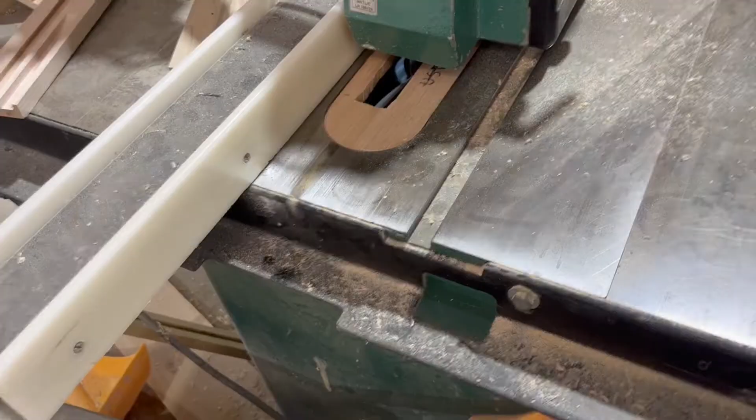So the interior, that's going to leave us with a 14-inch opening here and, let's see, 36, so a 33-inch opening from top to bottom, right? And I'm also not going to go over how to make a door for this because I want to focus more on the actual box construction for the corner cabinet.

I want to briefly go over some of the tooling that I'm going to be using. So this is going to be my 3/8 compression bit. You can kind of see that. This is going to be my bit that's going to do the full thickness of the cut, so it's going to actually cut out the pieces. We have a 1/2 end mill, and this is what we're going to do our dado lines with. So it's a 1/2 inch in diameter.

This is what we're going to be doing the shelf drill holes with. My machine actually has a drill bank, but VCarve can't control my drill bank on this machine. So what I had to do is I took one of those drill bits that would normally go up into the drill head, and I just put it inside its own tooling. And that's how we get around the inability to control the drill head on the bigger machines.

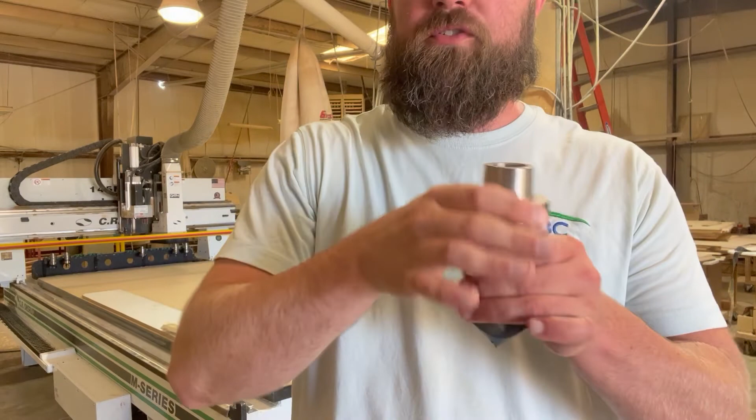And the last bit that we're going to be using, this is the V bit. All right, so this is 2.25 inch diameter. It's a single flute, and this bit has a maximum cut depth of 1 inch. So this is the tool that we're going to be using to cut out that clipped back support that's going to go behind the cabinet.

Now that we're loaded into VCarve, the first thing that I'm going to do is create a new file. Under job setup, single sided, 96 by 48, 1/2 inch on the material thickness. 0 is going to be the machine bed, and then bottom left for the XY datum. Hit OK. So the first thing I'm going to do before I get started is name all of my layers, and I'm going to name them based off of the tooling I'm going to be using. And this is something that I just do for every program that I use.

So our 3/8 compression, we'll color this orange. I'm going to add a new layer. This is going to be our 1/2 inch end mill. We'll color this one blue, and I'm going to add a new layer, and this will be our, we'll just say 5mm drill bit, and we'll give this one a green color. Alright.

So now that we've got our layers, I'm going to come over here to draw a rectangle. And I'm going to make sure my X and Y are at 0. In the X, I'm going to put 36 inches, and in the Y, I'm going to put 11.5. Alright. Now, let's make sure we have... I want to be in my 3/8 compression for this. So I'm going to right click.

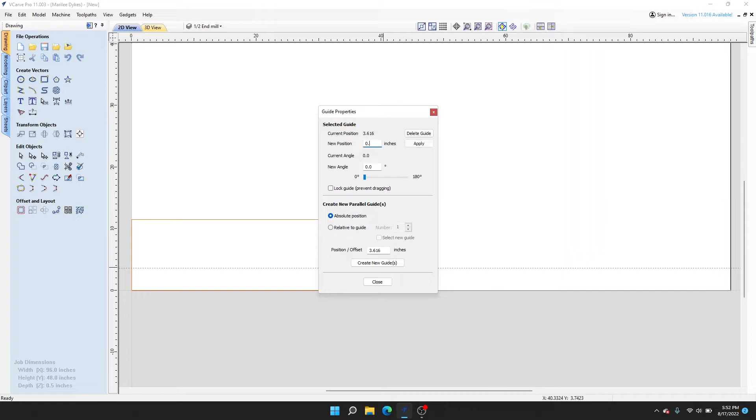Next thing I'm going to do is come up here and select my 1/2 inch end mill layer. So we've got that selected. I'm going to right click and throw in some guides. First we'll do a horizontal guide, and I'm going to put in my new position 0.5 inches. Hit apply. This is going to be my back rabbet line.

So we use 1/2 inch backs on most of our cabinets, so I'm going to be using that 1/2 inch end mill to run a 1/2 inch back rabbet down it. So we've got our 1/2 inch tooling selected. I'm going to turn on snapping, come over here to my line tool, and click on the left side and then on the right side.

I'm going to right click and just delete that guide for a second. So you can see it's blue because that was what I set for the layer color. Alright. Now that we've got our rabbet, I'm going to right click and insert a vertical guide. This one we're going to come over 3/4 of an inch. Typically on wall cabinets, you've got a 3/4 inch lip before your dados start on either side.

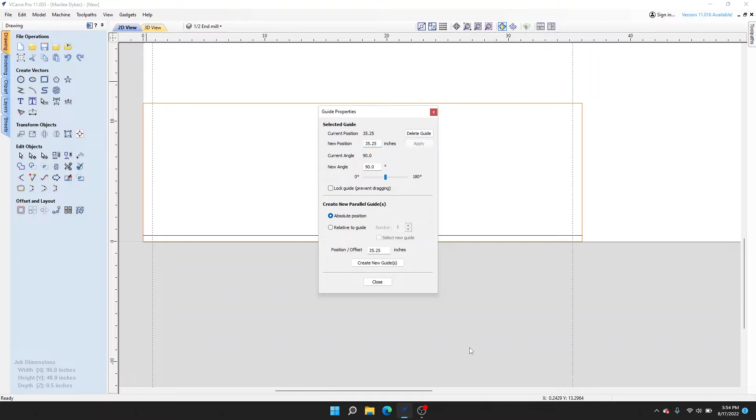So I'm going to right click, add another vertical guide, and in the new position I'm going to put 35 1/4, and that should give me my right side dado. That should be 3/4 inches spaced out. So we're going to do the same thing. I'm going to turn on snapping, come over here to the line tool, and I'm just going to create my dado lines.

Come up here to view, guidelines, and we're going to delete all guides so we can see. So it's looking like a wall end. We've got our dados and our back rabbets, so now all we need to do is add the drill holes. The way we're going to do that is I'm going to come up here and make sure I have my 5mm drill selected.

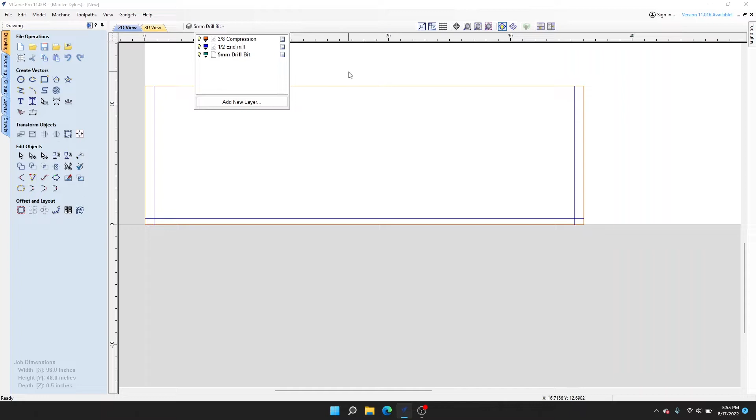I'm going to right click and create a horizontal guide first. For the first one, we're going to come in 2.5 inches from the top and from the bottom. So we'll do 2.5. That gives us our first guide. And we'll go another horizontal. This one, we're going to take 11.5 inches and subtract 2.5 inches from that. So that should give us 9 inches.

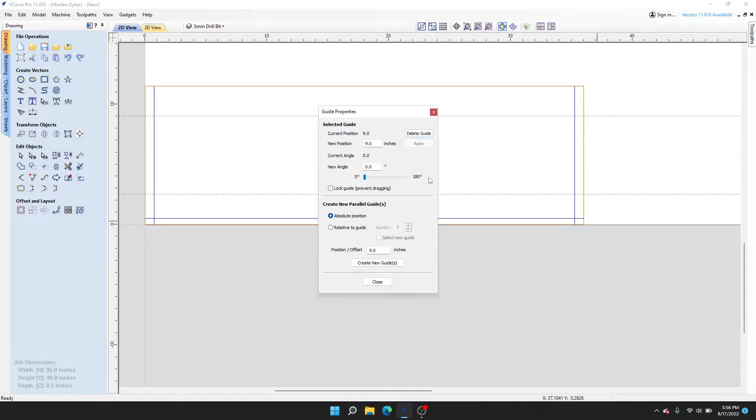Close that out. Now that we've got our two guides that represent where the center of our drill holes are going to be, we've got to figure out where the holes are going to start. I'm going to assume this is the bottom of my wall end. We typically start our drill holes 5.5 inches up from the bottom. So I'm going to create a vertical guide. These are 36 inch, so we're going to go 30.5, backwards 5.5 inches, and this is where our holes are going to start and where our centers are going to be.

So what we want to do now is come down here to create new parallel guides. We're going to turn on relative to guide. In the numbers, I'm just going to put 20. This is going to be the number of drill holes. So we'll just go 20 for now. Standard spacing is 1.25 inches between holes, so from center to center it's 1.25 inches.

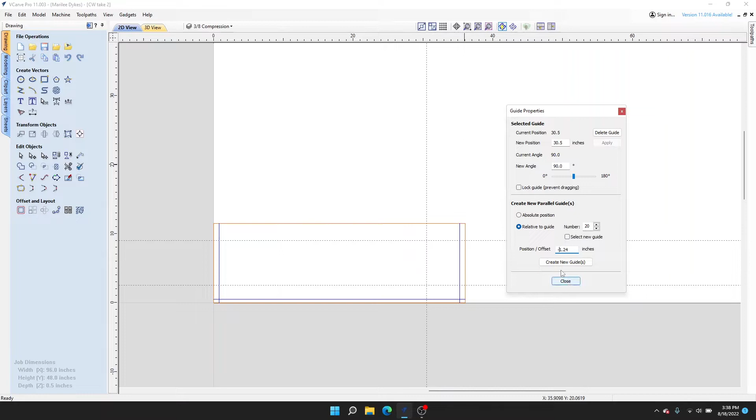What I'm going to actually do is put a negative sign. If I were to leave it positive, it's going to go that way. We want it to go this way 20 times. So I'm going to put that negative, and create new guides. Okay, there we have it.

So now that we have all our intersections, we're going to come over here to draw a circle. The radius really does not matter. I'm going to leave it at 0.15. I'm going to zoom in, turn on snapping, and just start clicking right here on the center of each line. The reason this doesn't matter is because I just need the center point. We're going to let the physical diameter of the drill bit drill out the hole.

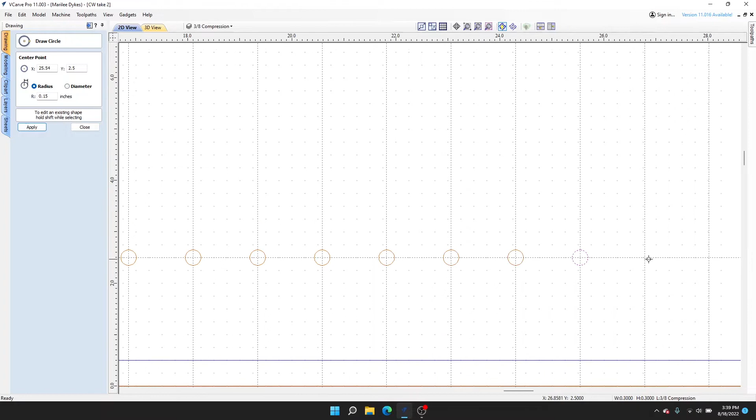Now that we've got all our drill holes put into place, we're going to close out of this. Let's turn off snapping, come out to view, and we're going to delete all guides. One thing I forgot to do is select my drill layer, so let's just select all these drill holes. We're going to right click, move to layer, so we'll move to the 5mm drill bit layer. So now they're green.

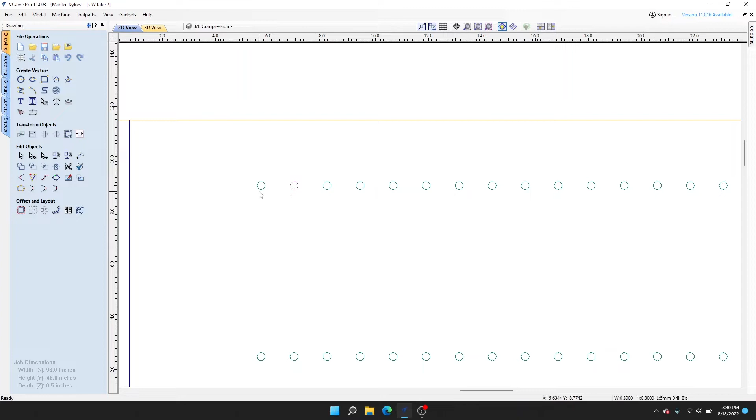So if I were to select each hole, they select independently of each other. When I go to assign the toolpaths, if I leave it like this, then I have to assign the path for each one, and that will take too much time. So what we're going to do is select everything. We're going to come up over here to group selected. And what that's going to allow me to do is if I click one, I click them all, and that's going to make it easier for me in the tool assignment phase.

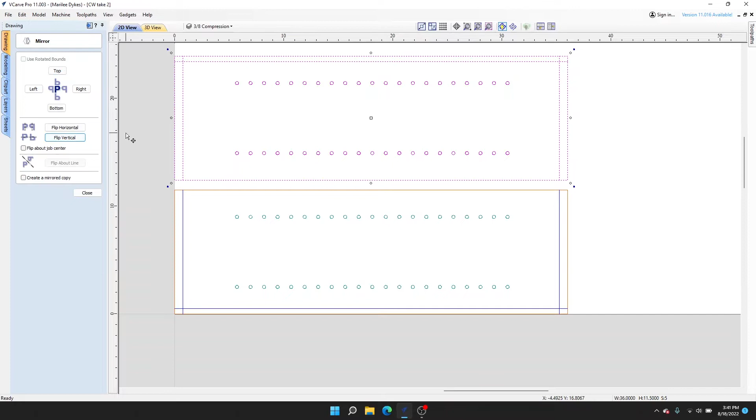So what we want to do now is right click. We're going to copy. We're going to paste it on itself. I'm going to use the arrow keys and we're going to go up just like that. And the very last step, I want to come over here to mirror selected and flip over the vertical, and all that is doing is flipping that back rabbet so that way we can make a left and a right. So that's it for the wall ends.

So moving on to the back, we're going to select our 3/8 compression layer. We're going to draw a rectangle. It's going to be 36 inches by 21.5, so that looks good. We're going to hit create. Alright, so now we are going to go into our half-inch end mill layer, and we're going to put in some dados. First one, I'm going to insert a vertical guide at position 35.25. Hit apply. We're going to add another vertical guide, and I'm going to put this one at 0.75 inches.

And this is where we want our two dados to be. So I'm going to click my line draw tool, snapping on. We're going to connect these two, right click. We're going to do the same here. Just like that. Turn snapping off. Alright, so what I need to do now is delete this guide, but I'm going to keep this one. And we're going to come up 5.5 inches just like we did, so that way our holes line up. So I'm going to put 30.5 here, and we're going to hit apply.

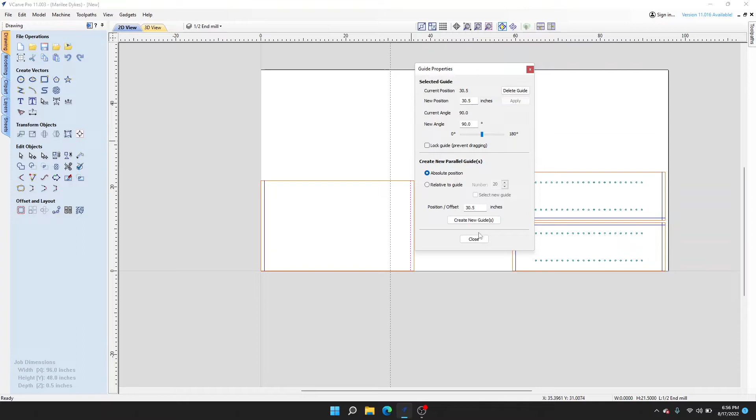Alright, so now I need to know where we're going to center these on, and to do that I'm going to close this out. We're actually going to put a horizontal guide in. I'm going to right click, and we're going to come up 16. There are wall cabinets where the back drill holes go in the back, but I'm going to put mine in the side, oriented more towards the back. So if you can imagine, this is towards the back side of the cabinet. This will be where the door is, the front.

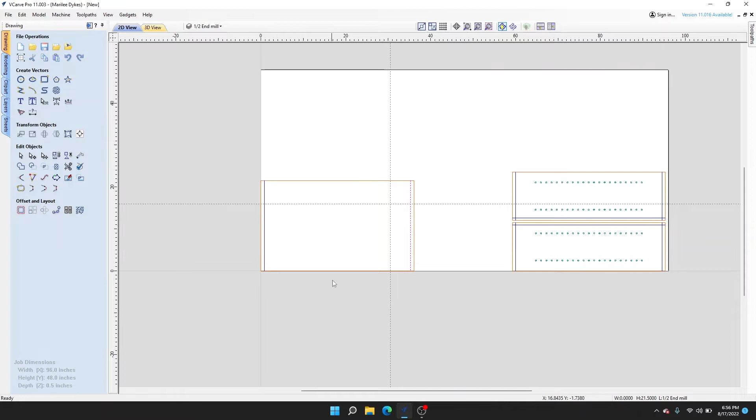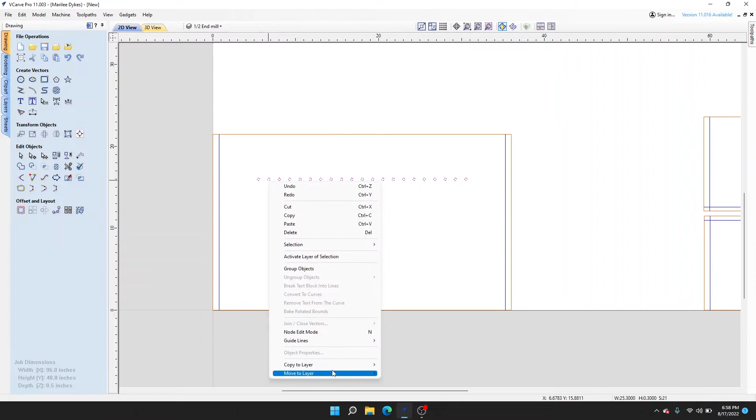So I'm going to right click this guide. We're going to come to relative to guide, just like we did for the wall ends. 20 times, we're going to do a -1.2 offset, and we're going to hit create. And that is going to give us, just like before, all the intersections where we're going to put our circle. Alright, so we've got our drill holes added, so we're going to come up to view, delete all guides. We're going to right click all these because we forgot to put them in the drill layer, but that's okay. Move to layer, 5mm drill. They should all be green, so we're going to select them all, group them, and now they are grouped.

So the last thing to do here is we're going to select everything, copy, paste. I'm going to use my arrow keys, so we're going to move everything up, and then I am going to come over to the mirror, and we're just going to mirror that. And that is the backs.

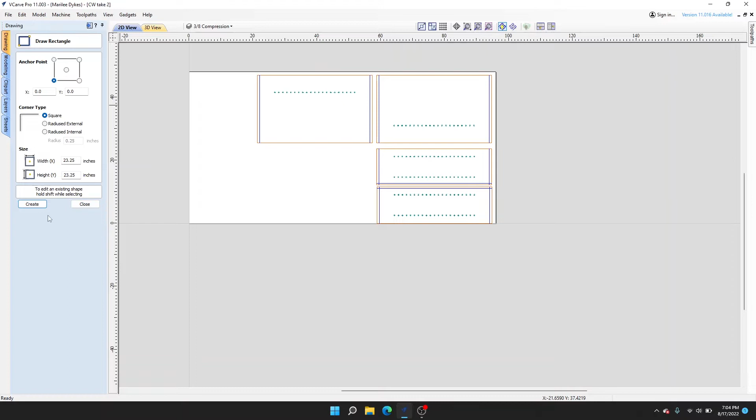We will now create our tops and bottoms. So we're going to come up, make sure the 3/8 compression layer is selected. We are going to go back to the rectangle, and for our width and our height, we are going to go 23 1/4. We're going to hit create. We're going to close out of here. So first thing we're going to do is create a horizontal guide. We're going to come up 2.5 inches.

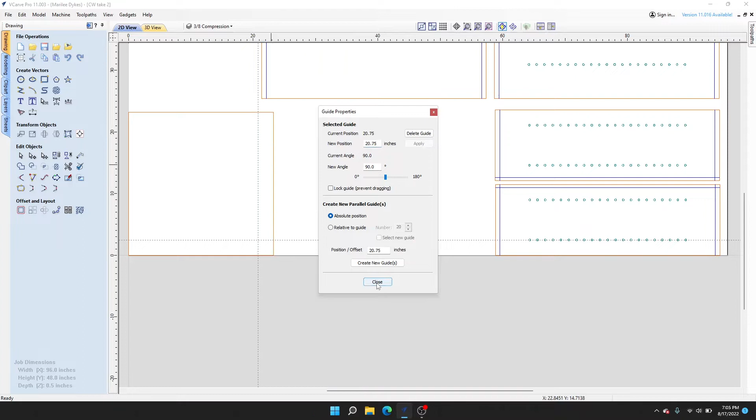We are going to create a vertical guide. We're going to right click that, and we're going to come 20 3/4 and hit apply. So now what we're going to do here is we're going to go turn on snapping. We're going to come to our line tool, and we're going to connect these two intersections.

Alright, once I've got that connected, I can come over here to my interactive trim, and I can get rid of that. We'll delete these out so we can see what we got. And that's going to be my clip. That's my clip for the back of the tops and bottoms.

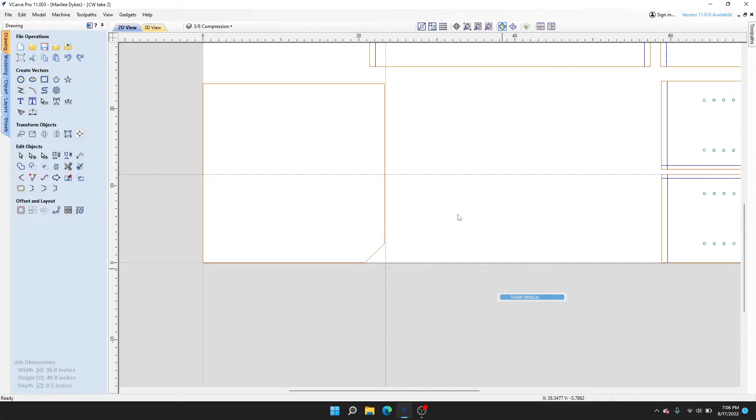So now what we want to do is we're going to come back and we're going to create another guide. Horizontal guide, and we're going to come up 11 1/2 inches up, and then we're going to create a vertical guide, and we are going to put in 11 3/4.

And what that should say, I need 11 1/2 from here, and I need 11 1/2 from here. So that 11 3/4 gives me that 11 1/2 right here. So we're going to do the same thing as before. Turn snapping on. Draw our line, connecting the two intersections. Right click out of there. Let's grab our trim tool. Let's delete these out to see what we got.

And there we've got the basic shape of our tops and bottoms. The only thing we need to add is if it's going into a face frame, we need to add the notches right here and the notches right here. So to do that, we're going to right click. We're going to start on this side. So let's create a vertical guide, and we're going to come over 1.5 inches.

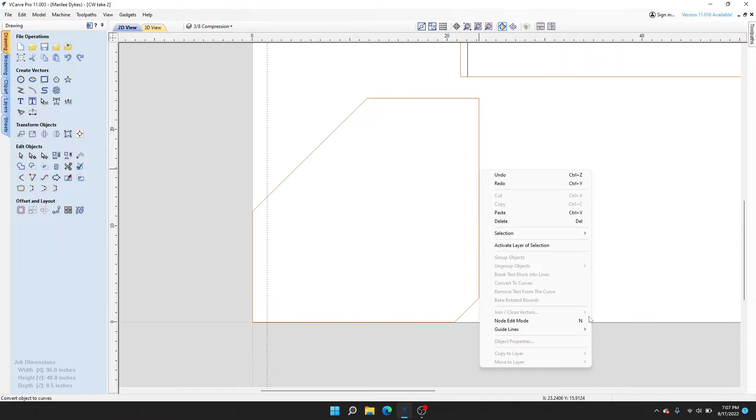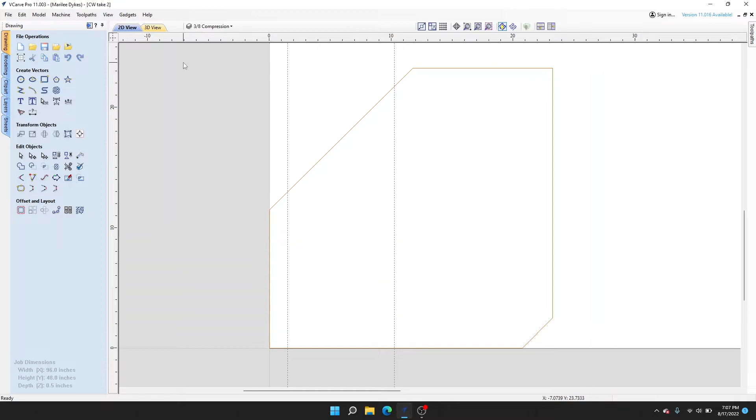Alright, and then we're going to create another vertical guide, and in this one we're going to put 10 1/4. Alright, so this is where we want the notches to start. So the next thing we want to do is to add the two notches. There's probably a couple ways to do it, but the way that I'm going to do it is I'm going to come down to offset and layout.

I'm going to select an inward offset, and I'm going to do it 0.25, so 1/4 inch, and I'm going to hit offset. Well, first I need to select the outline and then hit offset. So what that did is it basically brought everything in a 1/4 inch. So what I'm going to do is I'm going to zoom in here. I'm going to turn on snapping. And I'm going to click right there, and I'm going to get it on this line.

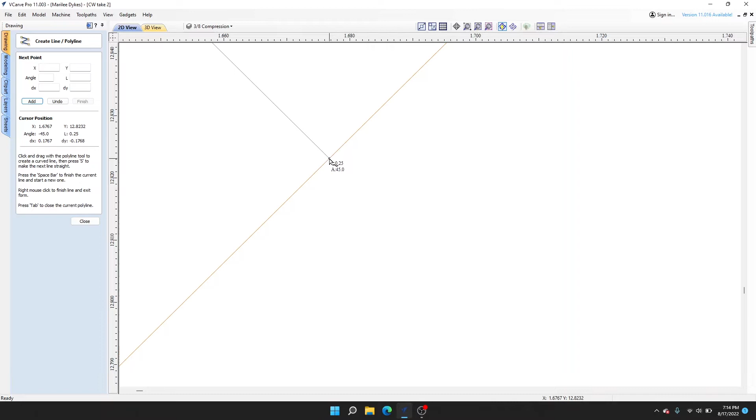I want to make sure that we're at a 45-degree angle. Come on. There we go, 45-degree angle. And then I'm going to come down here. I'm going to click on that point, and it doesn't really matter where, as long as you make sure the angle's 45. That's all we want to do there.

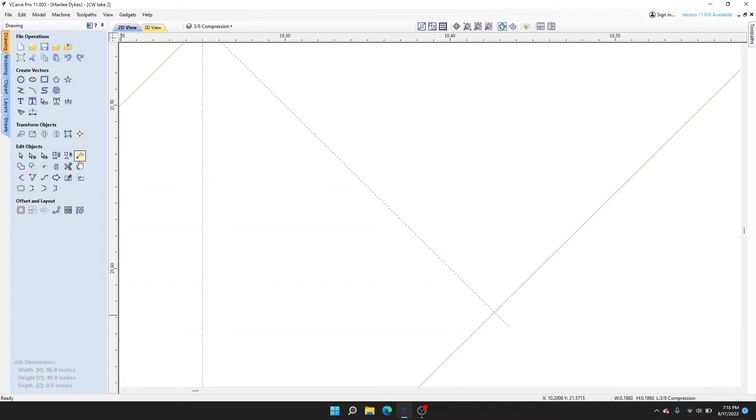So then we're going to do the same thing right here. Hopefully this one doesn't give us as much trouble. So I'm going to select my line tool. We're going to come over here and we're going to do the same thing. So we're going to get it down here. And there's my 45. I'm just going to go ahead and kind of clip that off. Alright.

So now we're going to grab our line tool. We're going to do the same. So I want to select that corner. I got a 45. It's okay if it hangs over a little. We're just going to get our trim out. And so now what we want to do is we just want to trim out this area. And I'm also going to trim out this little tail.

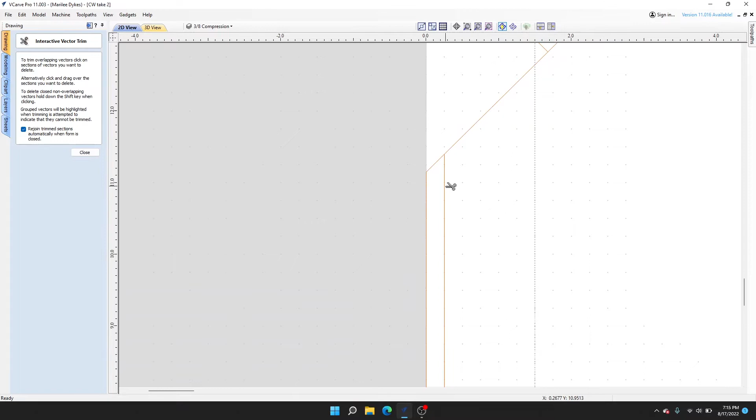But then I also want to trim out this whole inner line because we don't need that anymore. So we're going to get rid of that. Let's also get rid of that. There we go. All right, so I turn off snapping, let me delete all the guides out here. So there we got our top, and these are going to be the notches, and it does not matter that this is not rounded. The physical bit is round, and so that will give us that rounded. So you don't have to worry about putting a chamfer there.

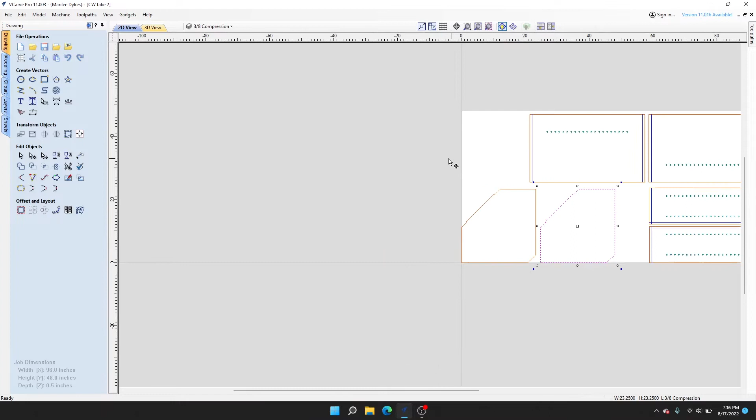So this is done. So we're going to grab everything, right click, we're going to get copy, paste, and we're going to use the arrow keys and we're going to move this over. And for the 1/2 inch material, that is it. Hopefully that wasn't too painful to watch.

Alright, so we're back at the main screen for VCarve. We're going to create a new file. Single-sided operation, that's all going to stay the same. The material thickness, we're now going to plug in 3/4 material. Machine bed is fine, everything's fine, so we're going to hit OK. Alright, so here is our 3/4 sheet of plywood.

Alright, so on this one, we're going to just do 2 layers. We'll do our 3/8 compression. I'm going to color that orange because that's what I always do. And then we're going to add a new layer, and this is going to be our V bit. We'll just put V bit. If you got different angles, you can put the angle it is.

Yeah, let's make this one pink. Why not? No, that's orange and pink is too close. Let's do like a dark blue. All right. So we're gonna go back to our 3/8 compression layer. So we're gonna make another rectangle. This is going to be a square.

And to fit this cabinet, it is going to be 22 and 11/16. So that is going to be 22.6875. And we're also going to put that in the Y, 22.6875. Alright, that all looks good. There we go. We got our first shelf. So from here, similar processes, it's all pretty close to the same.

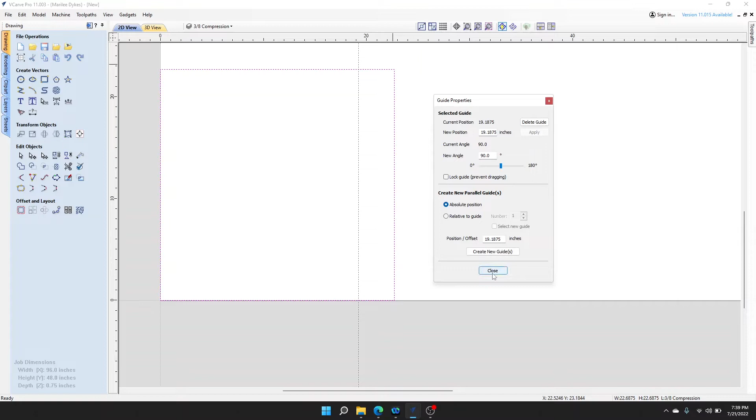And then if we close that out from the bottom, we're going to create a horizontal line. And we're going to clear out everything here, and we're going to go 3.5. We're going to hit enter, apply. Alright, so let's measure this thing. Man, that sounds like some funky numbers. So let's measure it, and we'll just see where we're at.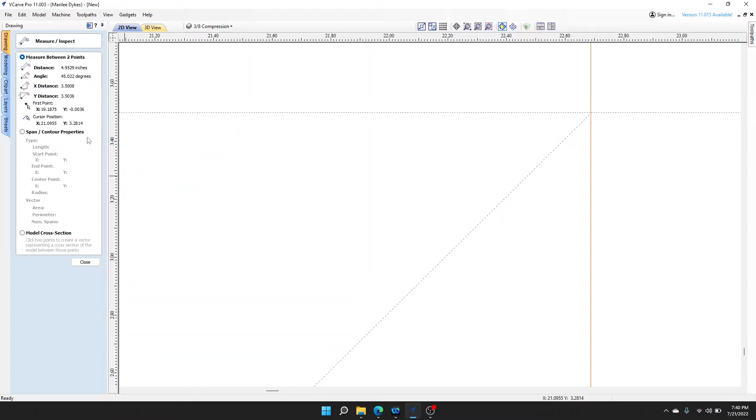So I'm gonna zoom in here, we're gonna click. And if you can see over here, I got it over just a little bit on the right, but we're 3.5036, so we're 3.5 inches. We're good there. All right, so let's turn snapping on. We'll go ahead and get our line tool. We're gonna connect the dots. I need to be a little bit more precise there.

All right, so let's travel up here, zoom in. That looks better. So there we go. So that's our clipped back for the shelf. So we're gonna come in with the trim tool, trim it out, hit escape, and there we go. All right, so for the top section, we're gonna come up 10.5 inches.

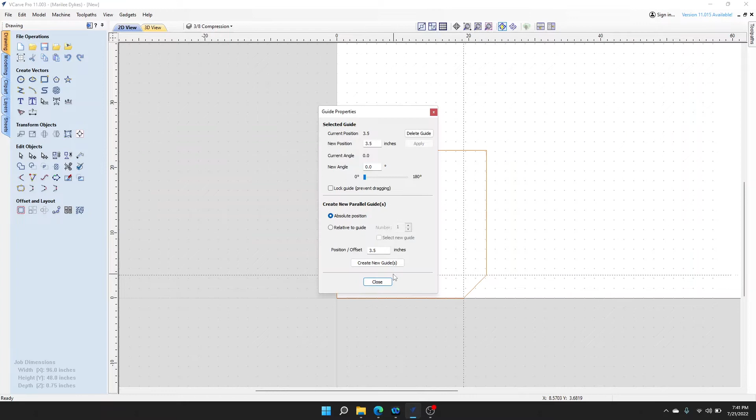So instead of 3.5 here, we're gonna go 10.5. That's going to get me there. And on this, we're going to say 22 and 11/16 minus 10.5. That's going to give us 12.1875. So we're going to put 12.1875. We're going to hit apply.

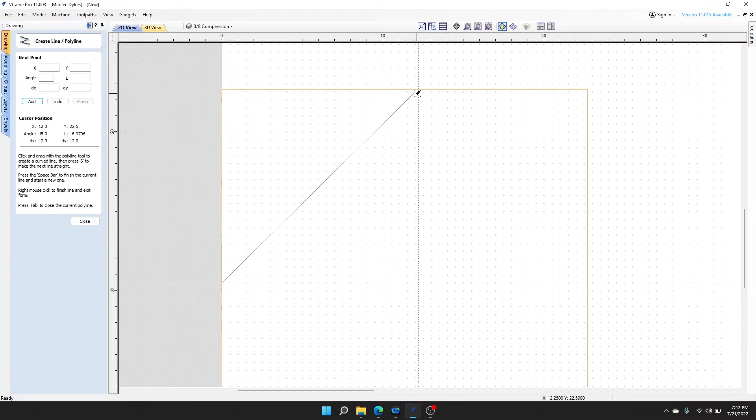And whenever you have numbers like that and you're not sure, just always get out the measuring tape, because we want 10.5, and when you're dealing with decimals, there we go, 10.5, perfect. So we know the math works out. All right, so now same thing as before. So we're going to come over to our line tool, zoom in, boom. There we go.

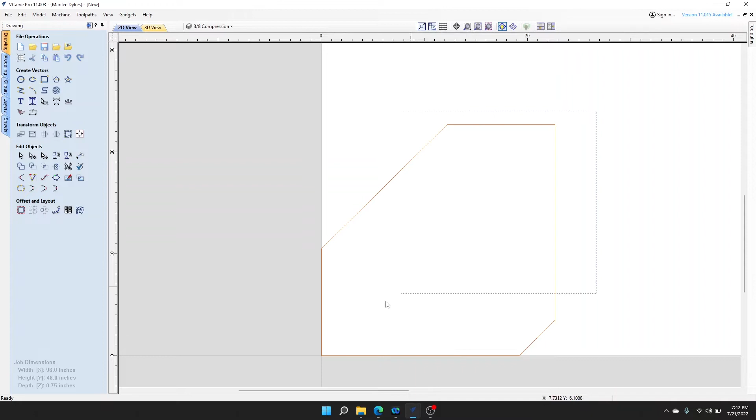Let's turn off snapping so we can see a little better. Hit escape. I'm going to delete this guy. I'm going to delete this guy. All right, there we go. So that's basically our shelf that's going to sit in there, and this one's pretty easy to visualize. Once it cuts out, it's going to be an angled shelf. So same as before, we're going to copy this. We're going to paste it on itself.

And you can use the mouse to move it up, or the keyboard. The mouse is faster, but the arrow keys are a little more precise. All right, so the very last thing we're going to do, I'm going to get both of these. We're just going to move these over out of the way. So we're going to make that

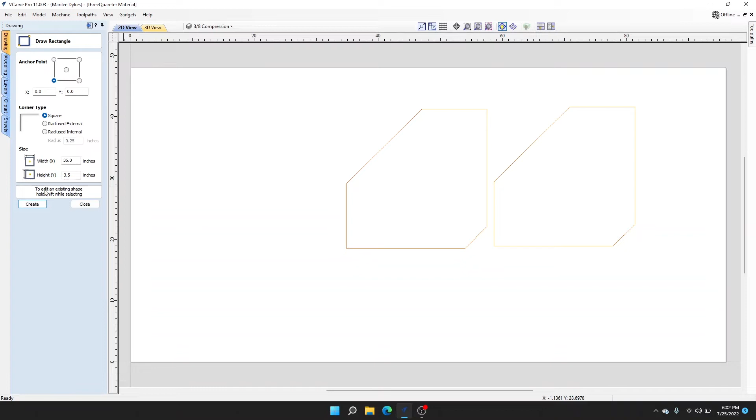angled clip support. So the last thing we're going to make is that clipped angled back support for the cabinet. It's going to go right across here. And so what we're going to do is we're going to make a rectangle. I'm going to go 36 in the X direction and 3.5 in the Y. We're going to hit create. Close this out. Let me just move this up and over a little so we can see what we're doing.

All right, so this is basically done, but there are a couple steps I need to do. If I select this all at once, see how it's all joined together, I need to break it up so I can assign my 3/8 compression on the ends to cut all the way through, but I want my V-bit to do the miters on the top and on the bottom. So I'm going to select it, hit N on the keyboard for node, and I'm going to start hovering over each corner and pressing the letter C.

And it does not look like anything's happening, but if I hit N again to exit node mode, now I can select each line individually, and that's going to be important for when we go to assign the tooling.

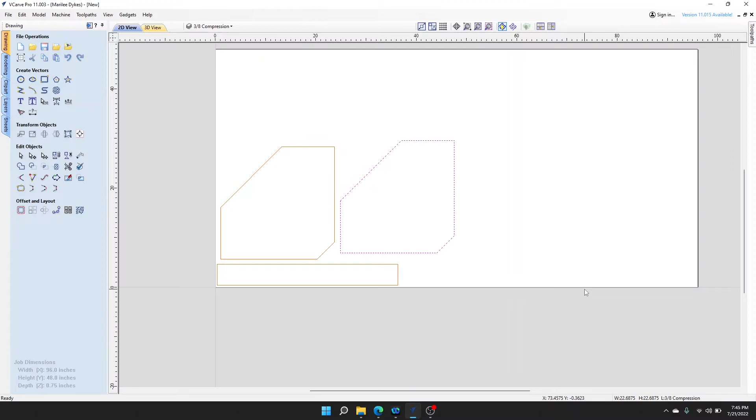That's basically it. The 3/4 material is not going to take up a full sheet. So we'll just rearrange this a little better, and for the body parts, it's kind of hard to get more than one cabinet on a full sheet, but for the shelving and stuff, if you're someone who's trying to be efficient, you can always fill this up with shelves and this piece, so you can at least optimize the full sheet.

And a trick, if you are using a CAD-based cabinet program. So I primarily use a CAD-based program to do all my designing, and my CAD will automatically cut straight lines out of the waste to make it more usable. This program won't do it, but an easy trick is if you're doing this on a full sheet of plywood, it'll just punch these right out of there, and you're going to have some funny shapes

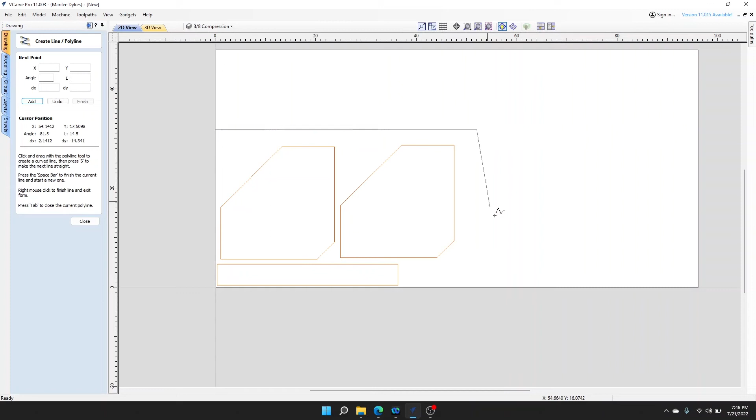in your plywood. So one thing you can do is just draw a simple box around whatever it is you're doing, and you will use your final cut-through bit to cut that out. And you could even keep this line going here, so that way you have a usable square here and a usable square here. So your only funny shaped scraps are going to be just this section here.

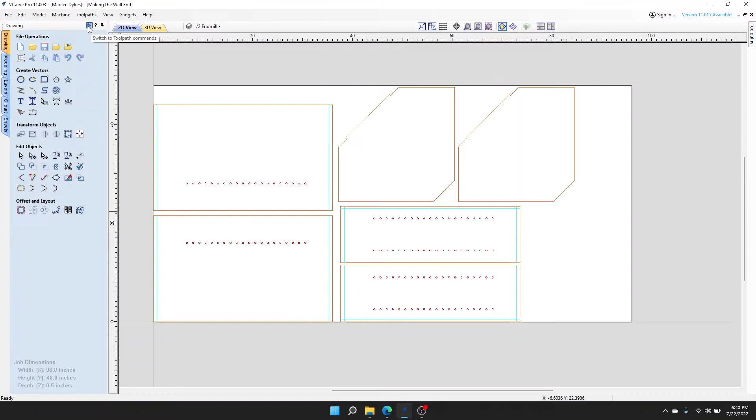So, all right, it looks like the only thing we have left to do is assign all the toolpaths to everything we've drawn up. So we've been in the drawing side of the program mostly. Now we're going to come up here to this little blue arrow that says switch to toolpath commands, and it's going to bring you over to this side, and this is where we're going to assign all of our operations. Here you can adjust the material if you need to.

We're going to start out with our 1/2-inch sheet of plywood, and basically I'm going to assign the drill holes first, then the dados, then the final cutouts. The reasoning is because that's how I want the real world operation to be. I want to do the drill holes first. All right, so we'll just start left to right, and remember how we grouped these. So now, one click, I select them all.

We're going to come over here to toolpath operations, and I just want to make a quick note that whenever I go into any of these commands, they're pulling the information off this tool database that contains all the information on the tooling. And if you're new to VCarve, you have to have your tooling information put in here before you can select it.

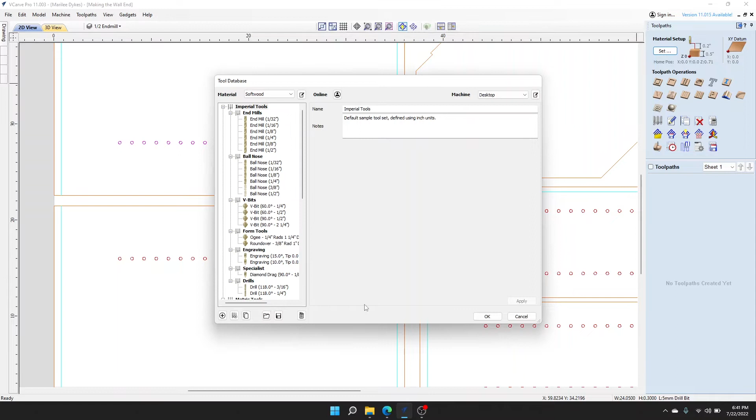So just keep that in mind. So with that selected, we're going to go to our drilling toolpath. We're going to come in, I believe it's 3/16. It's 0.375. That's how deep I want my drill bit to go, because that's how deep I need it for my shelf pin. If your shelf pin has a different depth, you can change that to whatever you need.

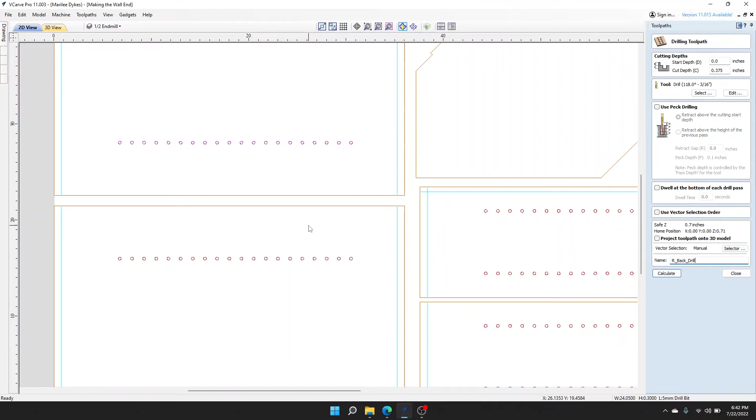But so we're going to come down here and we're going to name this. This is going to be the right back. I know that's kind of hard to visualize maybe right now, but we're going to do R_back_drill, and we'll just leave it at that. And I like to name my stuff very clearly, so that way when you get a lot of operations, you can easily identify which one it is.

So we're just going to hit calculate, and if we reset our preview here, and if I preview all toolpaths, we can see, bam, put them right there. Alright, so now we're going to go down here, we're going to click that, close out of this, same thing, except we're going to do left_back_drill, okay, hit calculate.

We grouped all that together, so this is going to be our left wall end. All that's correct, so we can put left_end_drill, hit calculate, go back to 2D view, click that again, close out of that, and we're going to put right_end_drill. The reason I use the underscores is I came from a little bit of animation background, and that's just how I like to space everything, so that's just personal preference.

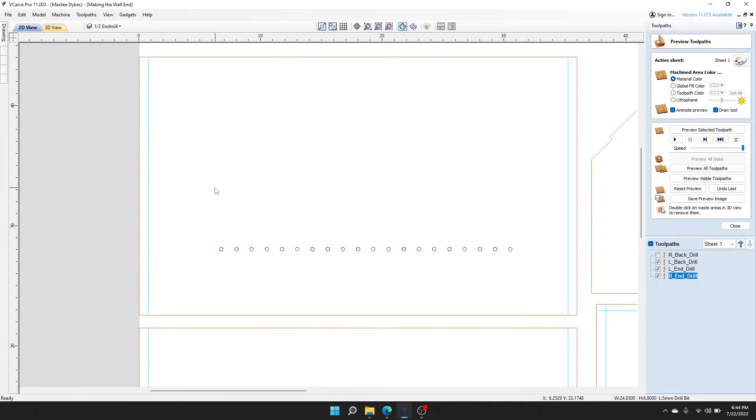Alright, looks good. So we've got all our drill holes assigned, and it's really that simple. So now we're going to move on to the half-inch end mill, the dados. We're going to start left to right again. So I'm going to select this line, and the reason I don't group these together, like we grouped the holes together, is because we need the tool to be on a very specific side.

We've got 3/4 here. I need that to be 3/4, so I need to make sure that my half-inch tooling stays on this side of it, and over here it needs to be on the opposite side of it. So if we group those together, it's not going to work the way I want it. So we're going to come over to the toolpath. We're going to go to the profile toolpath.

And this dado, we're only going in 1/4 inch. So let's put 1/4 inch on the cut depth. Let's go to my tooling. We're going to select my half-inch end mill, and I'm going to hit select. So it's going to do it in one pass. And so here's kind of a little trial and error. Some of you guys might know exactly which one to pick right off the bat, but I don't always know. So this is how I do it.

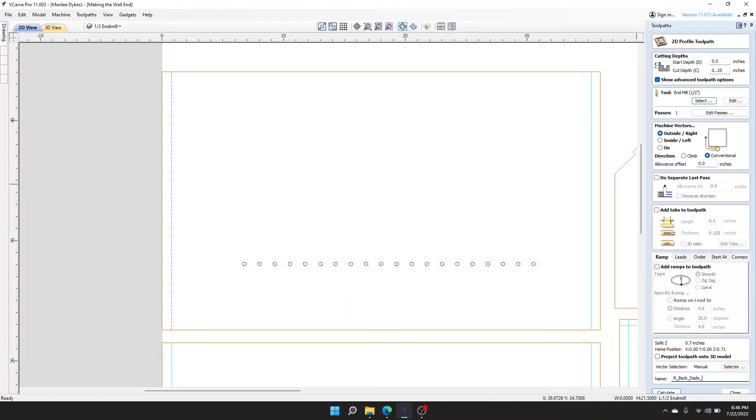We know we're not going to want it on the line. This is just the way that the tooling is going to travel, and then this is, do you want the tooling outside the vector, inside the vector, or directly on the vector? You'll see what I'm saying here in a second. Let's say this is the right back, and we'll call this dado_1, because there's going to be 2 dados for each back.

So if I go down here to calculate, I can come back here to the 2D view, and you see here's my line. This is where the toolpath is, and that's not where I want it, because it's going to take a ½ inch off this way. I need it on this side of the line. So it's very easy. We're just going to double click that path that we just made, click inside on the machine vector, and hit calculate.

Now if we come back, now you can see it is on the correct side of the line, because remember, we need 3/4 from here to here. So I need that tooling to be on that side. So now we know that if we come over here to this dado, whatever this was, we'll do the opposite. So we'll go to the outside right.

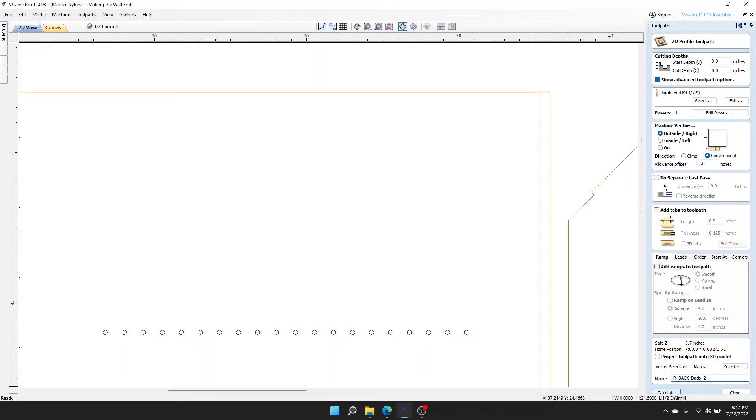Okay, so everything else should be the same. So we'll put right_back. I caps locked it, but that's okay. And we'll put dado_2. All right, so if we hit calculate, if we come back over here, see, there we go. We're on the right side of the line, or the left. We're on the correct side of the line, the left side.

All right, so that back is done. So let's repeat the operation. All right, so let's go to our toolpath. All right, so we're gonna cut at a 1/4. Oh, I hit enter. I did not mean to. So let's go back to that. Okay, so we want 1/4 deep.

I believe we've established that we want the inside left. So we want left_back_dado_1. I'm gonna hit calculate. I'm gonna go back, and it is not the side we need. So this is where, you know, the skill in running these programs, it's a very simple program. You kind of figure out the little trial and error things, so to speak. And a lot of these design programs are like that.

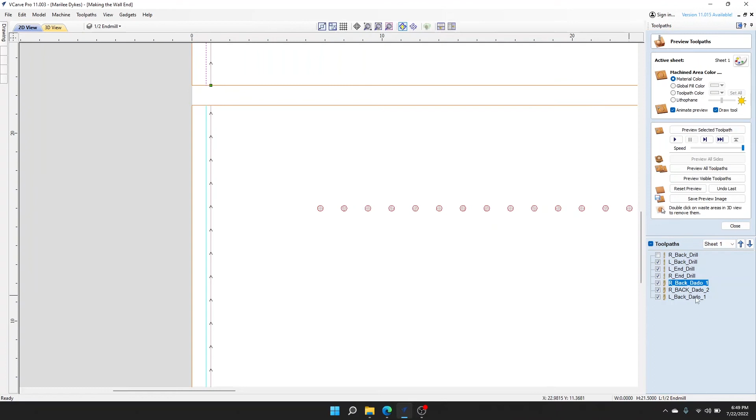There is one thing I do want to double check. All right, yeah. See, let's see. You got to make sure you plug your numbers in. I guess maybe I didn't hit enter on that one. So it was going to cut it at basically zero deep, and we don't want that. Yes. Same with this one. Let's see. Okay, we should be good now.

Yep, we're good. And at any point of the way, you can test this in 3D. I'm just doing this fast to save time, but you can hit preview all toolpaths as you're going to check it. But to not drag this out longer than it needs to be, we're just gonna keep rolling here. So we're going to click profile. We're gonna go 1/4 inch deep.

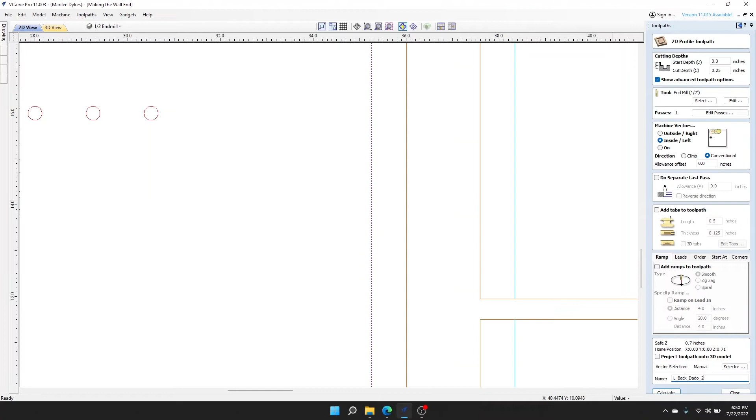Okay, this, we should be on the inside. Okay, let's go left. Left_back_dado_2. All right, everything looks good. Okay, we hit calculate. All right, so now we're gonna move to the wall end.

All right, so we'll come up here to the rabbit first. Rabbit is the same concept whether you're using 1/2 inch or a 1/4 inch. And let's see, this is the left end. We'll just put rabbit. All right, so we'll leave it at that, and we'll just see.

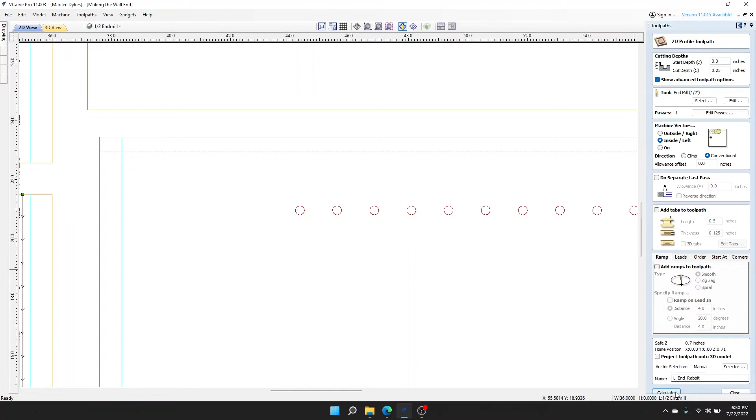So if I calculate it, whether you're doing a 1/4 inch or a 1/2 inch, see, we set this line 1/2 inch out, so that full width of the tooling is going to give me the rabbit. If you want a 1/4 inch back, you just move this in 1/4 inch. All right, so there we got the rabbit. All right, let's close this out. Let's come back to profile.

Alright, looks good, so we'll do left_end_dado_1. Hit calculate, come over to 2D view, make sure that it's on the correct side of the line, which it is. Close that out. We're going to come back over here, select the right dado. Same thing, we're just going to switch the vector.

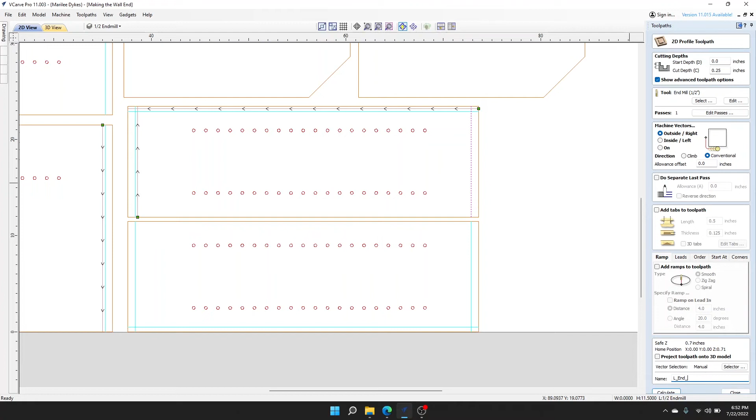Left_end_dado_2. Calculate. Looks good. It's where we want it. All right, so now we go down to our last wall end, our right wall end.

All right, so this one, same thing as before, except we're going to go right_end_dado_1. Calculate. All right, we're on the right side of the line. Okay, come over here. Let's do that for our last dado. Right.

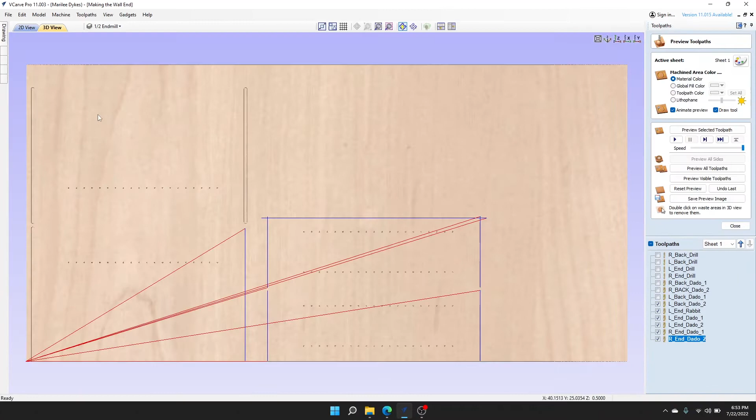2, and I believe I need to change my machine vector. Let's see. Yep. All right, so looking good. So if we go to 3D view, reset, and preview all toolpaths, we should see that it's starting to look like it needs to. So it looks correct. Okay, so all we've got to do is start punching this stuff out now. All right.

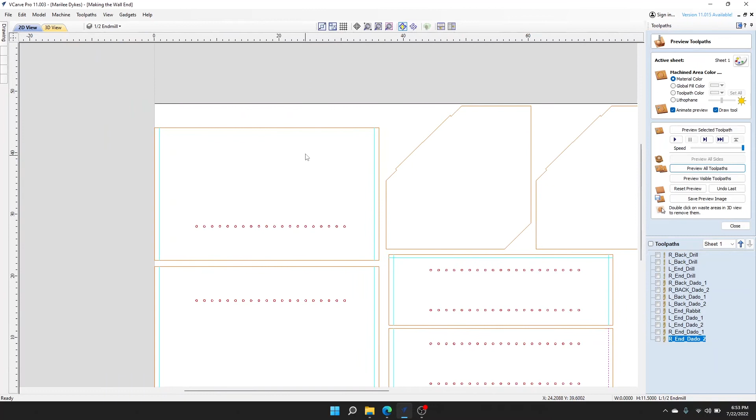So now we're going to select the outside of that back. Come to our profile. All right, so now we do want to cut the full thickness of the board. It's 1/2 inch material, so we want to go down 1/2 inch. We're going to come to my 3/8 end mill and hit select.

I am using an automatic tool changer on my CNC, so it is critical that I get the tool numbers correct. If you're using a CNC with automatic tool changing, do not use my numbers here if those are not the numbers that correlate with your tooling. If you have to manually change your tooling, then this doesn't matter for you, but just keep in mind that this is specific to my machine and my machine only.

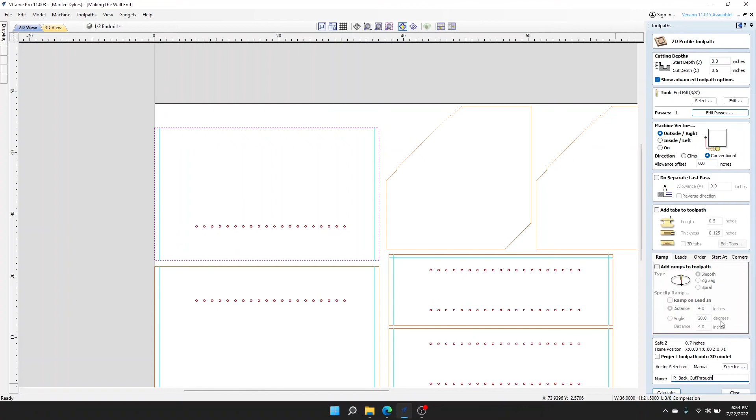All right, so 18. Okay, so we definitely don't want to do that in 2 passes. This was a 1 pass operation. I don't know why I put 2 passes in there. All right, so we're going outside, I believe. And I do the same naming convention on everything. When I do my final cutouts, I name them cut through. So anytime I see the word cut through, I know that it's my tool number 4, my 3/8 compression, that's doing the work. All right, so we're going to close that out.

Do the same thing. I don't know why it's doing that. All right, so we'll put left back cut through. All right, that's both looking good. Then we'll come up to, we'll call this one the top. Doesn't really matter, they're both the same. Let's see, what am I doing?

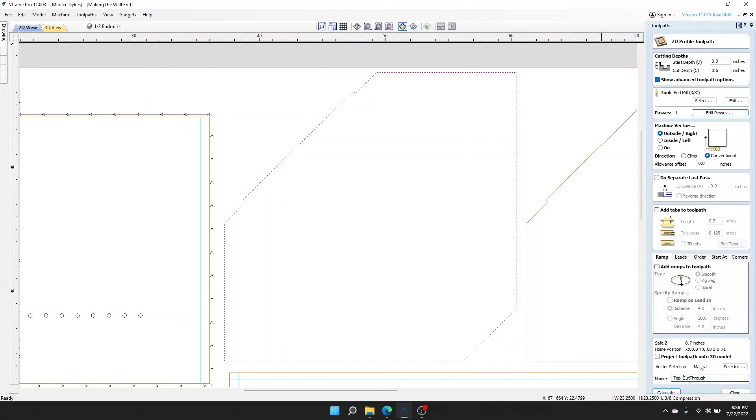Top underscore cut through. And the reason I'm going down to 1 pass is that on my machine, the 3/8 compression I'm using at 18,000 RPMs. If you're using a smaller tool to cut this out, maybe you can let this thing calculate the passes for you. But for me, I can definitely do it in 1 pass.

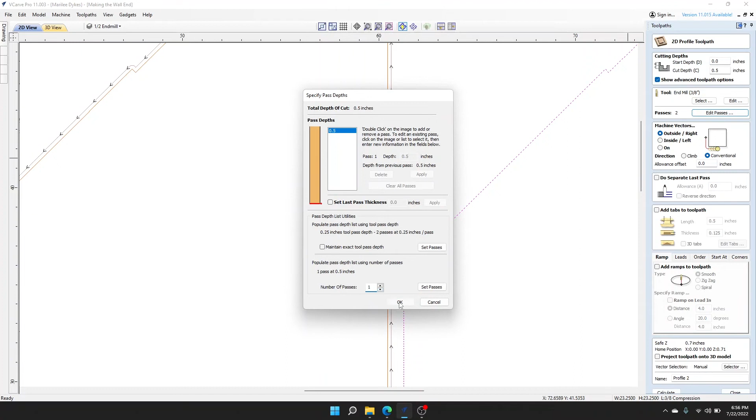All right, so yeah, speeds and feeds are pretty important. I'm not going to go into that because that would take way too long, but if you do any amount of CNC work, or you're thinking about doing it, your feeds and speeds are a huge part of it.

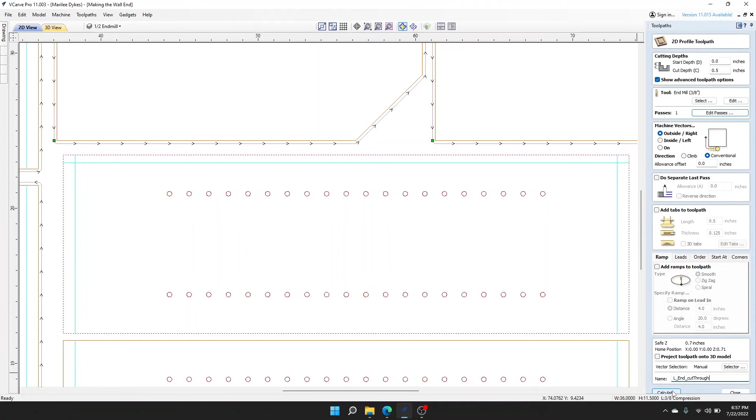All right, so we're going to calculate that. So that looks good. Now we just got the wall to do. And what did I say? This is quick fit. All right, so it's going to be left end cut through. Calculate it, just double check we're on the correct side. I know I go back and forth a lot, but I hate it when I get too far down the line and realize that I'm off somewhere and have to go back and change it. So I just got into the habit of constantly going back and forth and making sure.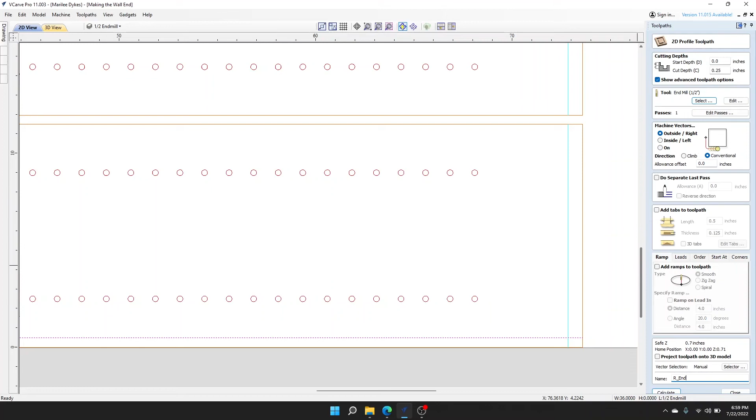Although it does look like something's wrong with this rabbet. You know what's wrong? I never did assign it. That's what's wrong. So real quickly, and it's good you're seeing this because this is how it goes a lot of the time. If I select my 1/2-inch end mill, we want to go down 1/4 inch. So we're going to put right end rabbet. Let me calculate this out. Let me make sure. Okay, I'm on the right side.

And what I want to do is drag this up to be under my other rabbet. This is the literal order that your machine is going to run the processes. And the reason I do everything together is because I want my machine to run everything with the same tooling before it switches to another one.

If I were to move this drill down here, it will drill all of these. It'll go start doing the dados, and then once it sees it drilling again, it'll go back, pick that one up just to do the one drill hole, and then go back. So you want to be aware of the ordering down here.

All right, so right here, this is your preview toolpaths button. So let's try it again. All right, that looks a lot better. I've got my rabbet up here and my rabbet down here, my back rabbet. All right, that is basically it for here.

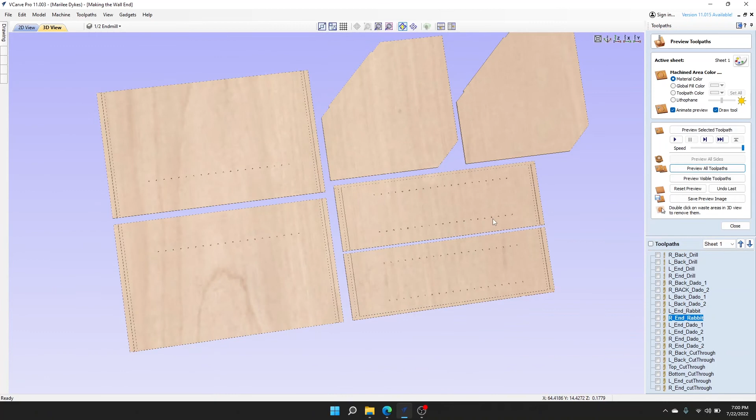So the final step that we're gonna do is we're gonna close this out. Make sure you save it, critical. All right, down here, we're gonna go to this very bottom right Save Toolpath button. We're gonna click that. We're going to have selected toolpaths highlighted, and you want to make sure you click them all.

Actually, we're going to do visible toolpaths, not selected toolpaths. So we want to make all of the toolpaths visible so you can see them all. But more important, you want to make sure they're listed right here. All right. So now that they're listed right there, you're going to select your post processor here.

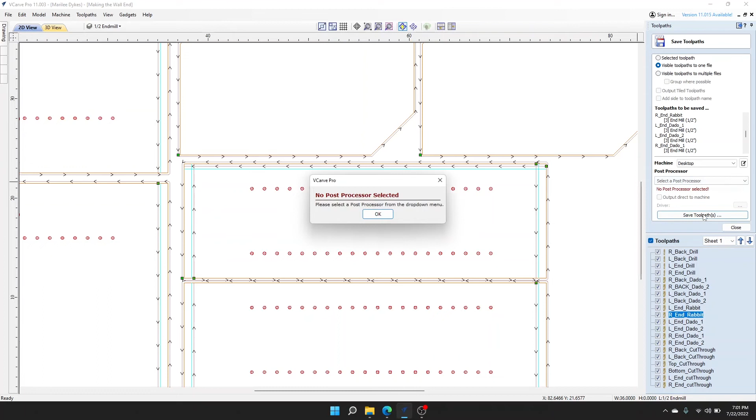So I'm using a laptop. This is not my work computer. My work computer is connected to my machine. So when we actually go to cut this out, maybe I'll show you. But this is where you're going to select your post for your machine. You're going to hit save. It's going to bring you to your regular Windows screen, so you can choose where to save it.

All right, so we're here to finish this out with the 3/4. The 2 shelves and then that clip back support. Real quick, I just want to explain what I'm doing here with these lines. I'm going to put a full sheet of plywood on there, and we're only going to cut out down here. And if I just leave it like it is, like I had said earlier, I get these weird shapes in a full sheet of plywood. So I made these lines.

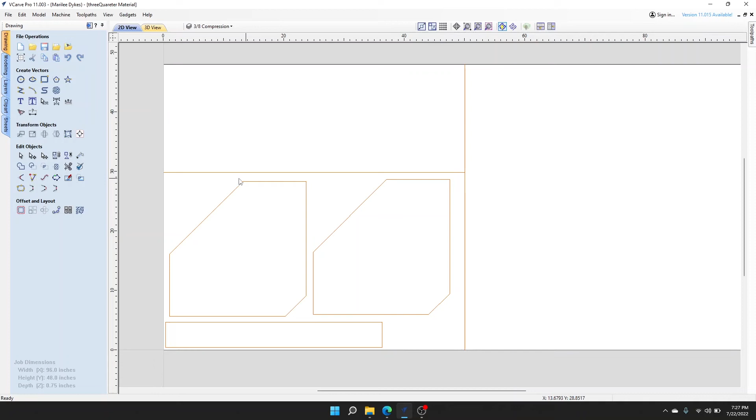So I'm going to assign a final cut off here to basically isolate this set of scrap from the rest, so I can save this piece and I can save that piece. So that's basically what I'm doing there. All right, so we're going to come back over here to Toolpaths, and let's select our first one, our first shelf. Let me just check that we're in the right, yep, okay, so we're in the right material thickness.

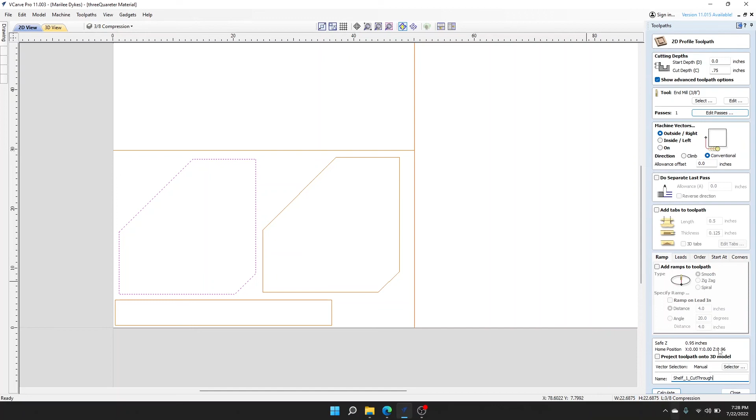So when we go here, we're going to select our 3/8 compression. We will actually want to cut the full 3/4. Again, I don't know why it's doing it in 3 passes, but we're going to go down to 1 pass. And we'll just put shelf_1, cut through. And we're going to hit calculate. Make sure we've got it on the correct side.

So we're going to do the same here. We're going to select passes. We're going to do 1 pass outside. We'll do shelf 2. All right, we got both of our shelves. Looking good. All right, so you remember down here that we basically split up the lines.

So we're going to select that first side. In fact, we're going to shift select the, well, we'll save that for a later video. We're going to do the step-by-step this time on this video. So we're going to do the same thing. We're going to edit passes. We're going to go down to 1. And my work computer is set up correctly, so it doesn't bump it up to 3 passes.

Alright, so we're going to call this clipped support. We'll just put left since it's the left side on the sheet, and then we'll put cut through.

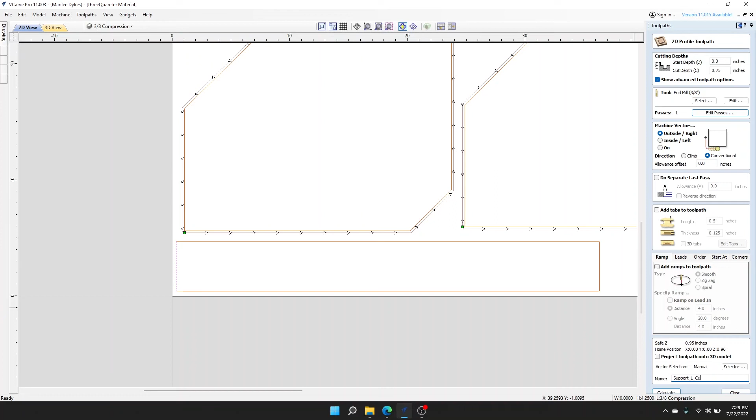Alright, with that selected, we're gonna hit calculate, go here, make sure that we're on the right side of the line. We are. So we'll come over here. We're going to do probably the inside left now. We're going to edit the passes. Alright, let's put support.

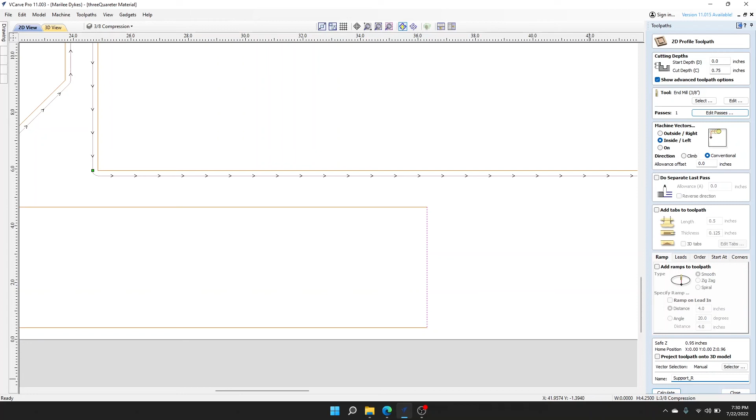Put right. And sometimes I just got to get creative with the names of the parts, but I like to name every part. It's just the way that my brain works. I like to know what I'm hearing when I hear the part name, what it's referencing to.

All right, so now we've got the left and the right cut out. So now what we're going to do here is we're going to come up to the top. We're going to hit close, go to our toolpaths, and we're going to come down here and we are going to select this V-bit. Now this is the V-bit I talked about earlier. I showed you the picture. Mine's a single flute. Let's select that.

And it cuts up to an inch. So this one has an inch cut, and this one is going to do it in multiple passes. I'm okay with that on the V-bit. So this is going to be the only tool that we've talked about that we are going to want to machine directly on the line.

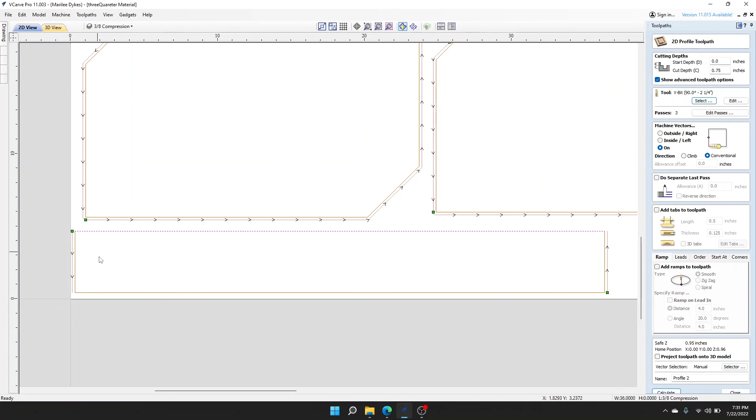And the reason is because this is cutting at an angle. This is going to basically 45 this piece all the way down. When it does that, I need the very tip of the piece. I need this measurement to be consistent. So I need the tip of the blade to cut all the way on the line, and then it'll put that 45 on both sides.

So what we're going to do here is we're going to put support, and I always name this miter on everything. So we'll put support miter 1. We'll hit calculate. And we're going to do the same thing down here. We're going to close this out, and we're going to go to toolpaths, cutting depth, on the line. We'll call this support miter 2. Alright, so let's hit calculate.

Alright, so then the only thing we have left to do is just assign these cutout lines, these waste saver lines. So I didn't join that one. That's okay. So we'll have it cut out this one first. So we'll go back to our 3/8 compression. Go into one pass. And this is where it doesn't make too much of a difference on how we're doing it. So we can leave it on the line. And I'm not even going to worry about naming this.

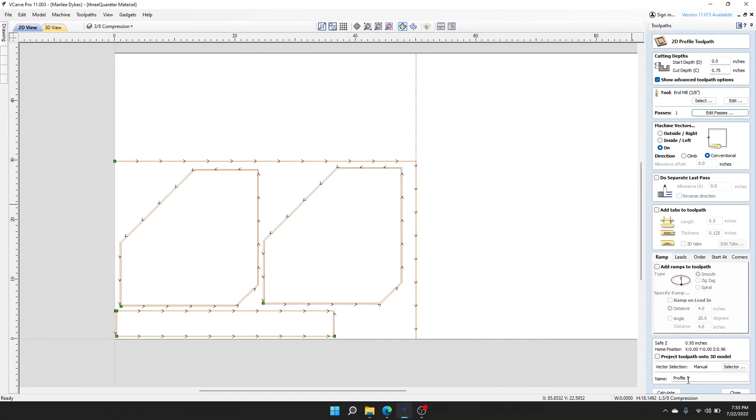And so then we'll do the same on this one. So we'll just make sure we're at a single pass on the line. We'll leave it at profile 3. That doesn't matter too much to me. Alright, so now we're going to preview all toolpaths. Alright, so it punched out this. We can get rid of that. We can get rid of that. And this one, I'll talk a little bit about what we're doing down here.

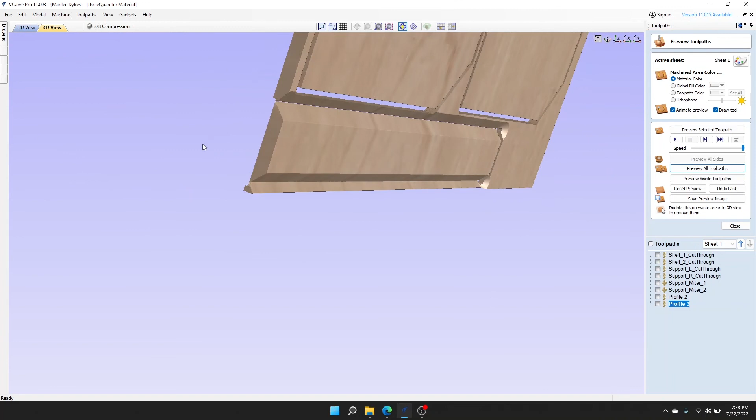Okay, so you can see how it put a nice miter on here. And that's that V-bit going down. When we cut this out for real, there is a little skin left here, but it'll just pop right out. The VCarve still thinks it's connected, and I can't separate this piece from that without going a little deeper in the program. But I don't want to do that. So this is what we're going to be left with. We'll have that waste piece here, that waste piece here that we can reuse.

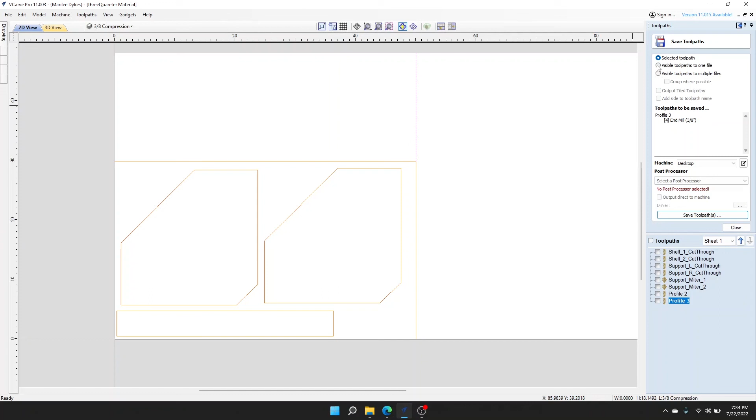So like I said, last step here is going to be saving it out. If you're using a manual machine, you're going to want to save out the 3/8 tooling by itself, and then export the V-bit by itself and run those as 2 separate programs. Or if you have an automatic tool changer like me, we're just going to select it all and save it out. So we will see you guys at the machine.